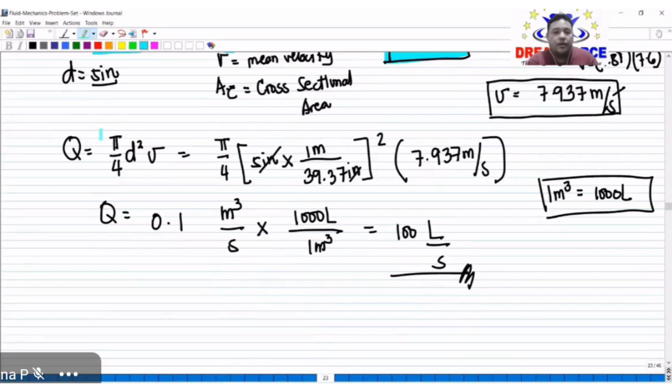Okay, next. Let's move on to number 40.

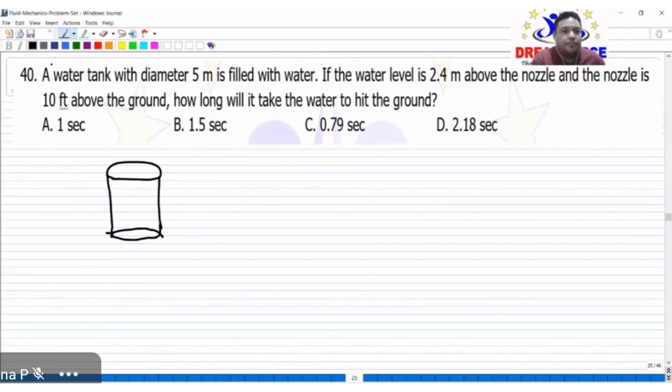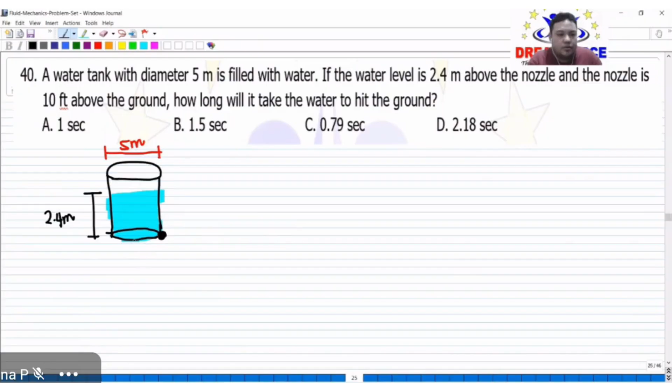Now, a water tank with diameter 5 meters is filled with water. Let's draw the tank. So given here is the diameter, which is 5 meters, and this is filled with water. If the water level is 2.4 meters above the nozzle, from the surface of the water to the nozzle, this is 2.4 meters, and the nozzle is 10 feet above the ground, meaning there's a stand. So this is our level ground, and the height here is 10 feet.

How long will it take the water to hit the ground? Take note, the tank has a hole, a nozzle, a small hole, and the path of our fluid will hit the ground. So it will form the track of a projectile.

So now the question is, how long or what time will it take the water to hit the ground? Since it's a projectile, let's use the equations of projectile motion. Take note, we are given the height. This is your releasing point, and the angle of release is 0, because it's naturally occurring, it just drops straight down. So theta here is 0.

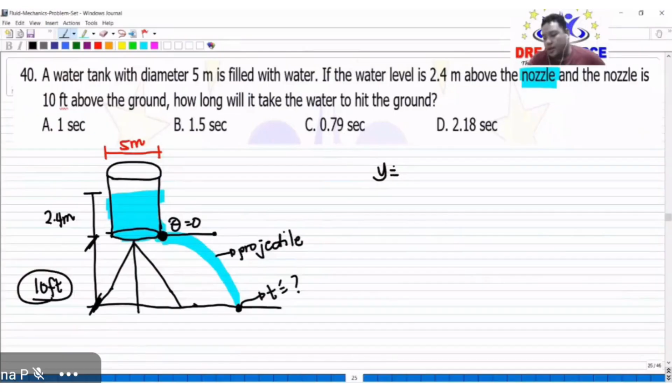Since we're solving for time, we use the y equation: y equals VOY times T minus 1/2 G T squared. Take note, VOY is VO sin theta. Our destination is lower than the releasing point, so our y here is negative 10. This equals VOY, which is VO sin 0 times time. But what is sin 0? It's 0.

Minus 1/2 G T squared. Take note, 10 feet is given in English units, so naturally we use gravity in English units too: 32.2 feet per second squared, multiplied by T squared. Let's just solve. So what is T equal to? 10 times 2 divided by 32.2, then we take the square root.

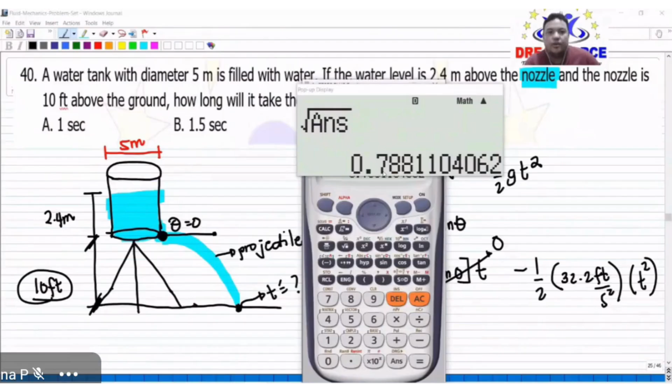Wait. 10 times 2 divided by 32.2, so that's correct. Okay, so that is 0.788 seconds, or approximately letter C.

Okay, now let's move on to number 14.

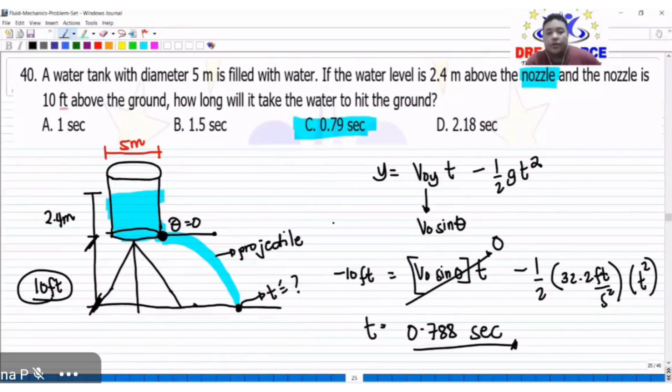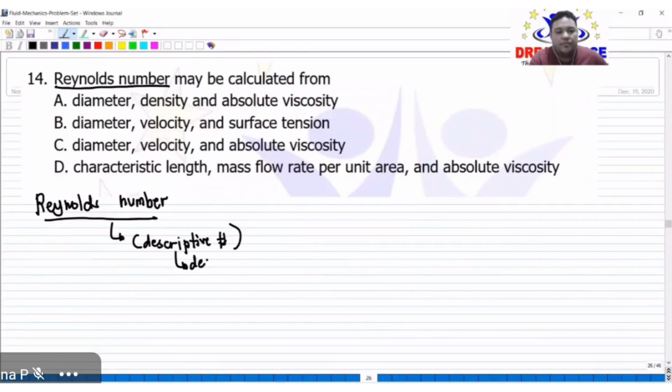Number 14. So Reynolds number may be calculated from what? Where do we find Reynolds number? Take note, the Reynolds number, when we say Reynolds number, it is a descriptive number — it describes what type of flow it is, the type of fluid flow. Actually, there are three types of fluid flow. But take note, our RE or Reynolds number is represented as RE.

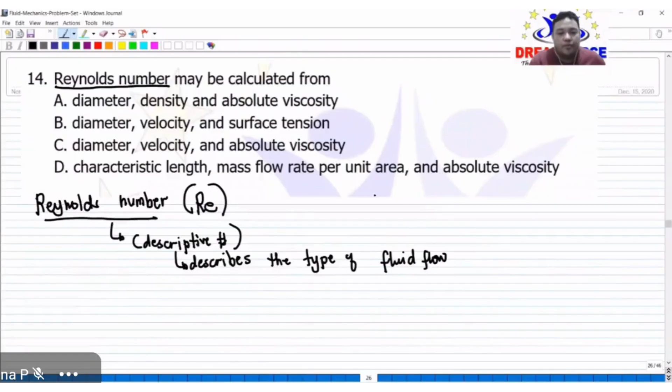First type of fluid flow is laminar. What is laminar? That is RE less than 2,300 — this is laminar flow. What is laminar flow? It's a fairly slow flow. A sample of laminar flow is oil, which is somewhat viscous.

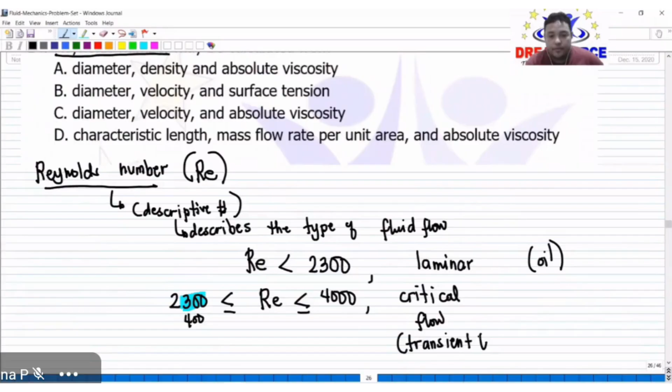Next is in between 2,300 to 4,000 — this is critical flow. In some books, this range is sometimes 2,000 to 4,000, depending on the book you're checking. The one I'm following is 2,300. So this is critical flow, or what we also call transient flow, in between 2,300 to 4,000, inclusive of both 2,300 and 4,000.

And lastly, greater than 4,000 — this flow is more chaotic, faster. This is what we call turbulent flow.

And our Reynolds number can be solved using the following formulas: RE equals V times D all over mu K, or equivalently V times D times rho all over mu D. Let us define the following: RE is your Reynolds number. Take note, since it's just a number, it is unitless.

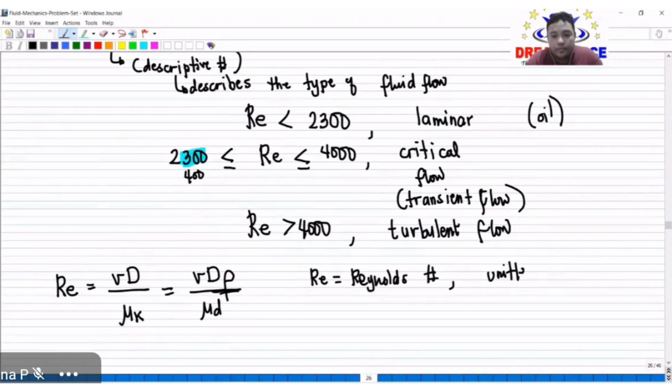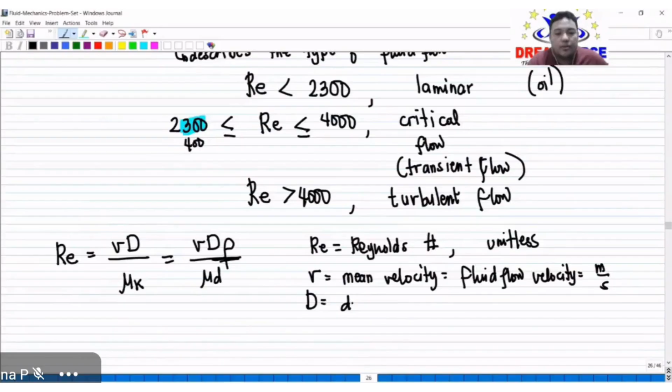So our V here is the mean velocity, or the fluid flow velocity. In terms of SI units, this is meters per second. How about D? This is the diameter of the pipe. We also have mu K, which is your kinematic viscosity, and the unit for that is meters squared per second.

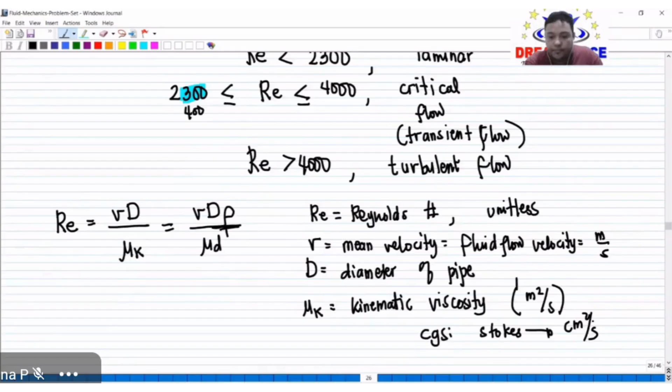And when in CGS units, this is in the form of Stokes. So the CGS unit or counterpart is Stokes, which is also equivalent to cm squared per second. So that is the equivalent or counterpart of kinematic viscosity in terms of CGS. Now, what is viscosity? When we say viscosity, this is the ability of the fluid to resist flow — meaning how thick or sticky your fluid is. That is our viscosity.

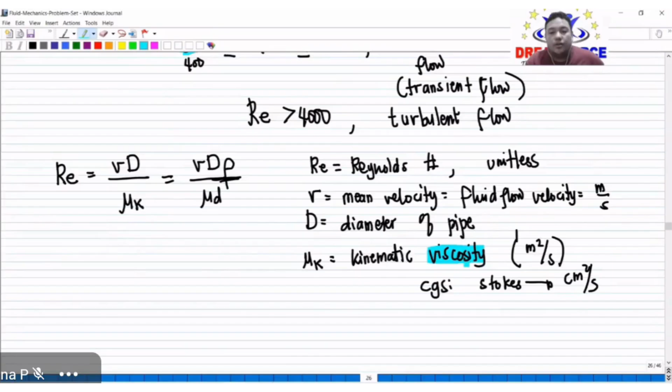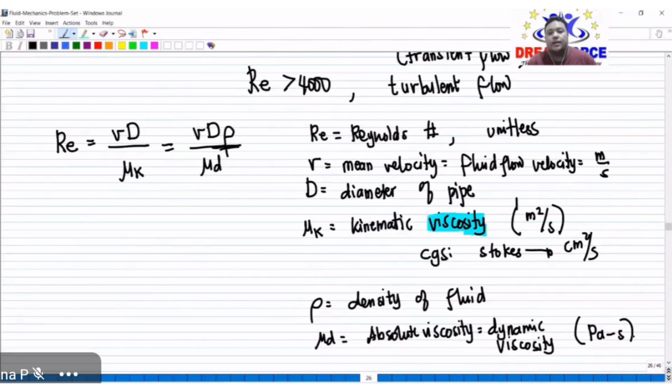And we have also your rho. This is your density ng fluid. And yung ating mu D, this is your absolute viscosity, or yung tinatawag nating dynamic viscosity. So, anong unit nito? This is in Pascal second. Pascal second.

Kapag po naka-CGS ito, this is in the form of poise. Ano po yung poise na yan? So poise is 1 gram per centimeter second. Okay, so that's poise.

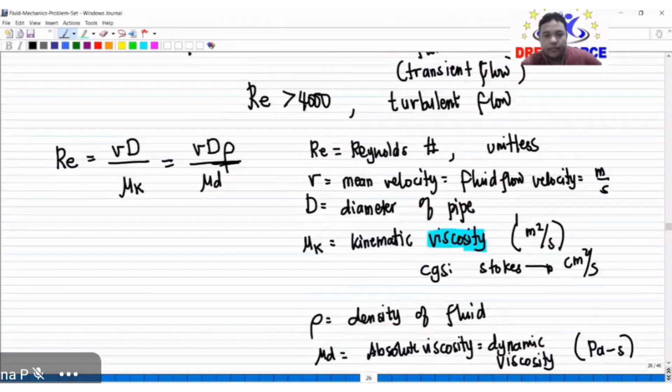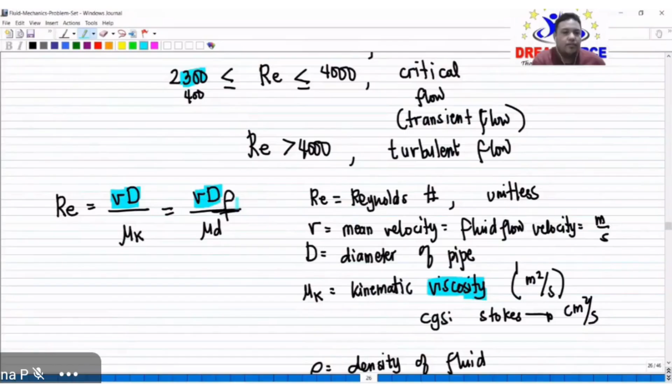At ano pa ang napapansin natin dito? Okay, sa ating RE, meron tayong V, meron tayong D. Ang kakaiba lang dito is yung isa may density, then iba yung ating mu. So, yan yung common sa kanilang dalawa.

So, why not dito sa number 14, kunin na lang natin yung common. Lahat po naman ito may diameter, yung A, B, C at D. Pero take note po, yung D natin wala, characteristic length, and wala naman to sa ating mga formula. So wrong na yan.

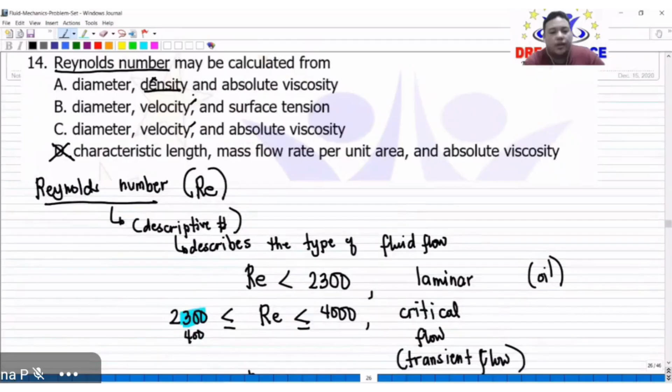So, dito, common ang velocity. So wrong na rin tong letter A kasi yung density natin is special formula to. Kapag mu D ang ating formula. Then, lastly, yung letter B, wala namang surface tension. So yung pinaka-common yung kukunin natin, letter C po yung sagot.

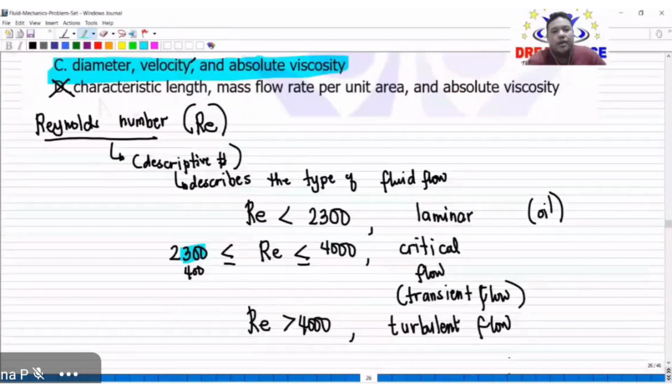Diameter, velocity, and absolute viscosity. Very common yan. So, diameter, merong diameter yung dalawang formula, merong velocity yung dalawang formula, and meron rin absolute viscosity. So, ito, that is letter C.

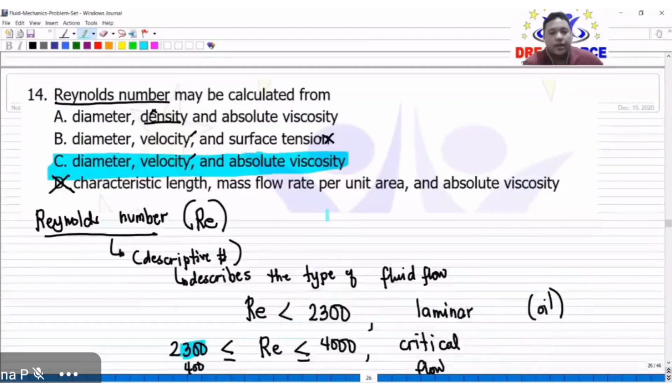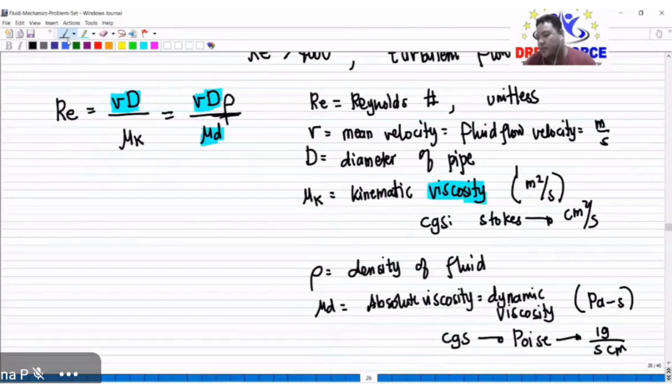So, yeah, part 1. Then, part 2. Then, part 3. Okay, take note po, kapag naka-SI naman na lahat, hindi ko na isusulat yung unit kasi magka-cancel rin siya. Pakitaan ko lang kayo ng isa, then let's solve other problems na wala ng unit kapag SI. So let's move on to number 22.

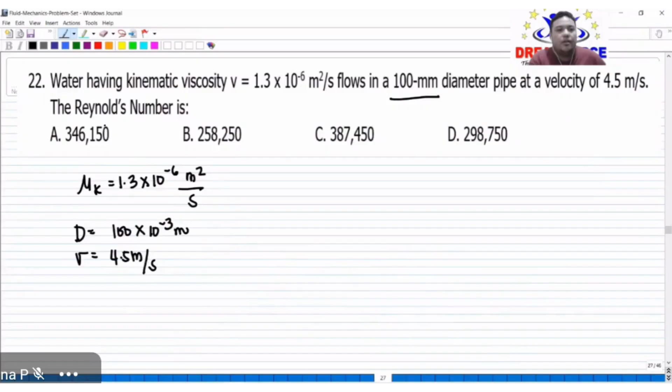Water having a kinematic viscosity, so yung ating mu K, that is equal to 1.3 times 10 to the negative 6 meters squared per second. Flows in, so yung ating diameter given, this is 100 times 10 to the negative 3 meter, at a velocity equal to 4.5 meters per second. Now, what's the Reynolds number? So R yung hinahanap natin.

Take note po, mu K yung given guys. So therefore, ano po ang ating Reynolds number? V times yung ating D all over mu K. So this is now equal to 4.5 meters per second multiplied by yung ating D, which is 100 times 10 raised to negative 3 meters, all over mu K, which is 1.3 times 10 raised to negative 6 meters squared per second.

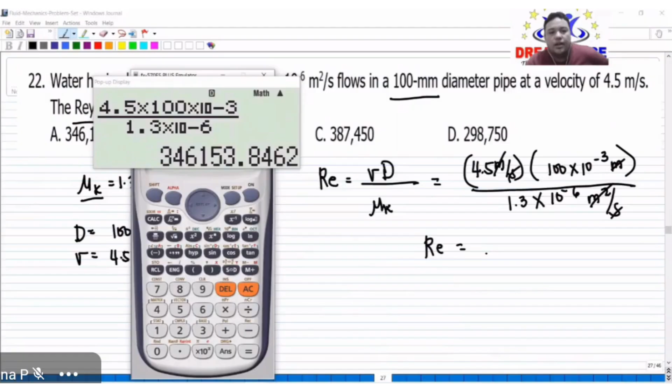So ano mga magka-cancel? Meter squared. So second at second, so unitless. And what's your R now equal to? So this is 4.5 times 100 times 10 to the negative 3 all over 1.3 times 10 to the negative 6. That is 346,153.

Okay, so type of fluid flow, this is turbulent, letter A. So, direct substitution lang yung mga ganito na. Basta alam lang natin yung formula.

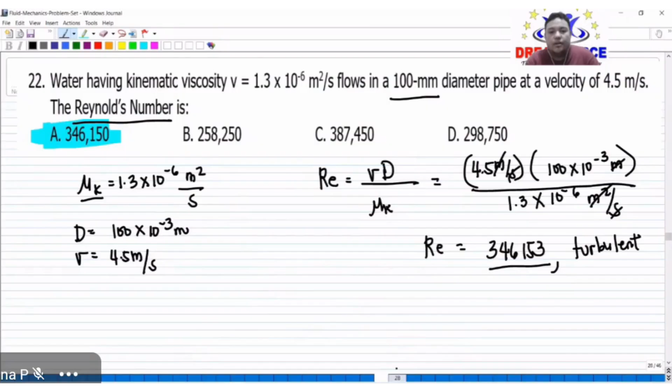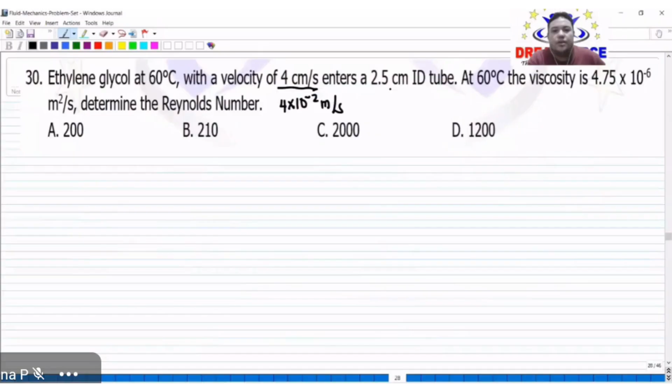Number 30. Ethylene glycol at 60 degrees Celsius with the velocity, this is 4 times 10 to the negative 2 meters per second. Enters a 2.5 cm ID tube, okay so meaning ito yung diameter natin. So D is equal to 2.5 times 10 to the negative 2 meters. At 60 degrees Celsius, the viscosity is 4.75 times 10 to the negative 6 meters squared per second.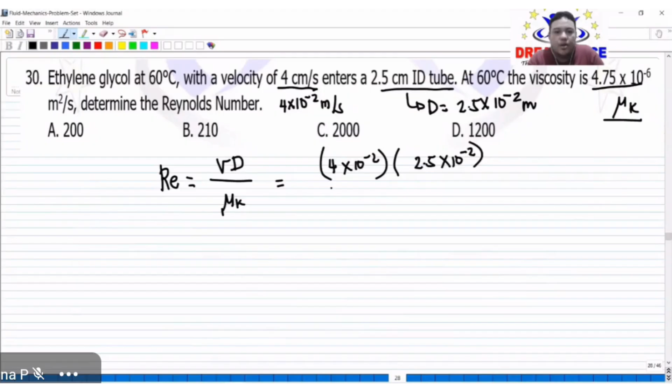So, this is your kinematic viscosity. Determine now your Reynolds number. Kinematic viscosity yung given. So therefore, this is equal to what? So VD all over yung ating mu K. So this is now equal to 4 times 10 to the negative 2 multiplied by diameter, 2.5 times 10 raised to negative 2, all over viscosity, which is 4.75 times 10 to the negative 6. Direct substitution.

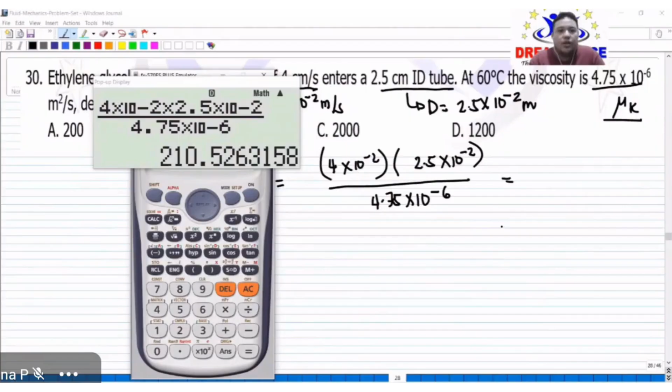So this is equal to 210.52 or 53 na. And this is type of flow, laminar. So this is letter B.

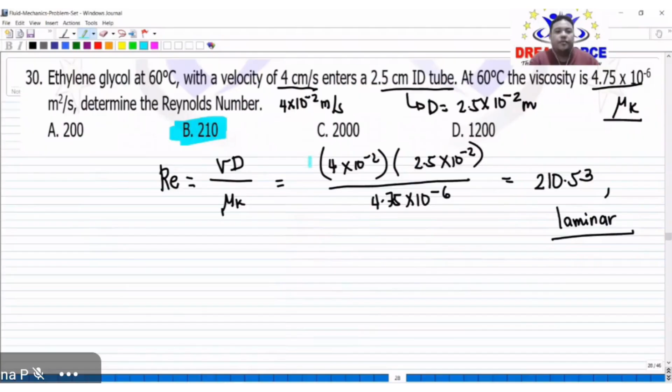So next na tayo. Number 31. Take note po, imbis na circular yung binigay sa atin is square, of side B, 2.5 times 10 to the negative 2 meter. 2.5 by 2.5. So ito medyo nakakalito kasi square section yung cross section natin.

If your air is at temperature 350 Kelvin, determine the Reynolds number. So at 350 Kelvin, yung ating viscosity is 20.76 times 10 to the negative 6 meters squared per second. So this is your kinematic viscosity. So for a square section po, paano kaya yung treatment natin dito?

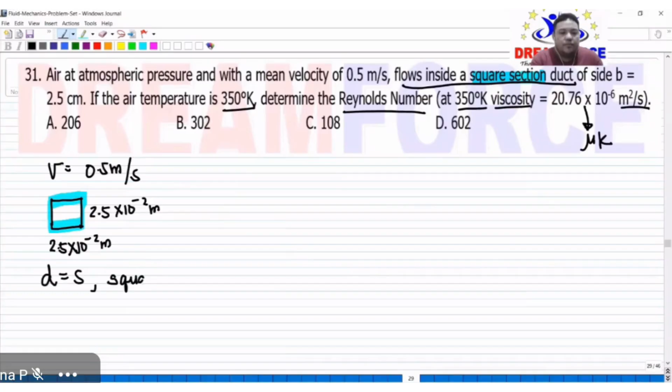Take note po, your diameter will be equal to the side. So this is for square ducts, yung diameter mo equal rin yan sa side. So therefore, RE is equal to what? So V times D all over mu K. So this is equal to 0.5 multiplied by diameter, which is equal also to the side, 2.5 times 10 to the negative 2, all over 20.76 times 10 to the negative 6. What is your Reynolds number equal to?

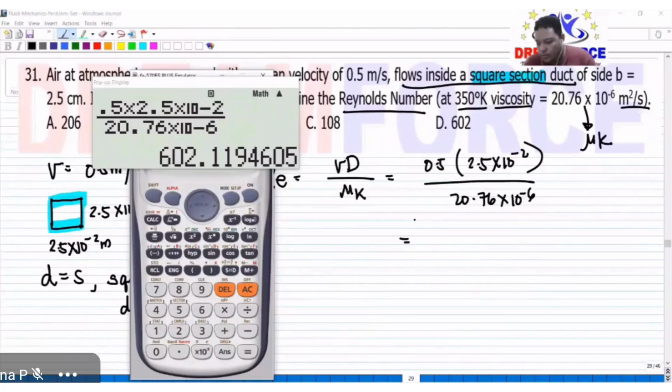So this is 0.5 times 2.5 times 10 to the negative 2, all over 20.76 times 10 to the negative 6. So this is 602. And type of flow, laminar. So this is letter D.

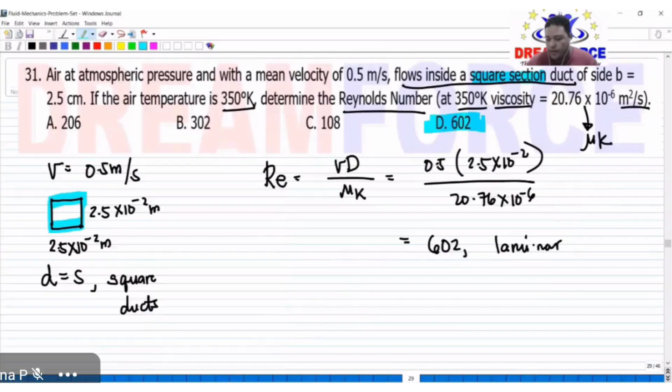Okay, next, number 32. Water is flowing to a pipe of radius 12 inches. So our radius, 12 inches, let's convert to diameter, this is equal to 24 inches. Take note, when Reynolds number is what we're looking for, it should be in SI. So let's multiply this by 1 meter is 39.37 inches. So our velocity, 11 meters per second.

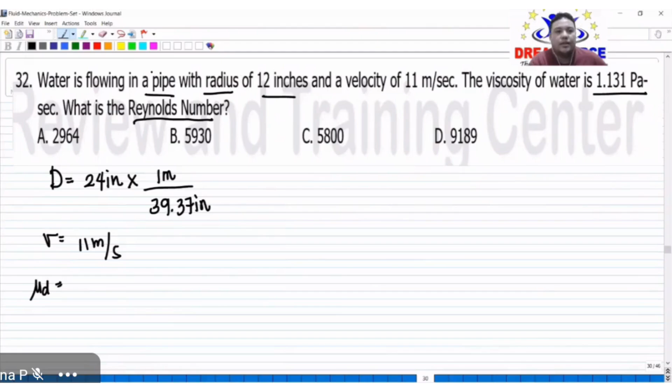Now, the viscosity of water is mu d. Why mu d? Pascal-second is our unit. So our mu d, 1.131 Pascal-second, unit for SI.

What is the Reynolds number? Take note, in terms of mu d, R is equal to V multiplied by D times our density, all over mu d. So this is now equal to velocity of our fluid flow, 11, SI. D is 24 multiplied by 1 over 39.37, already in meters. Multiplied by density of water, in SI this is 1,000 kilogram per cubic meter. So water ito. So times 1,000 all over 1.131 Pascal-second, already in SI.

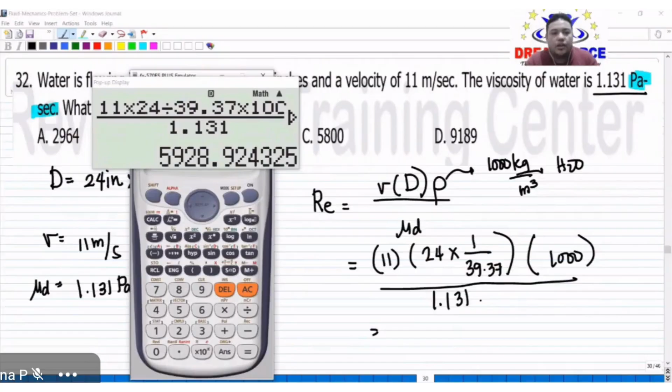So 11 times 24 divided by 39.37 times 1,000 over 1.131. So this is equal to 5928. Okay, and this is approximately letter B.

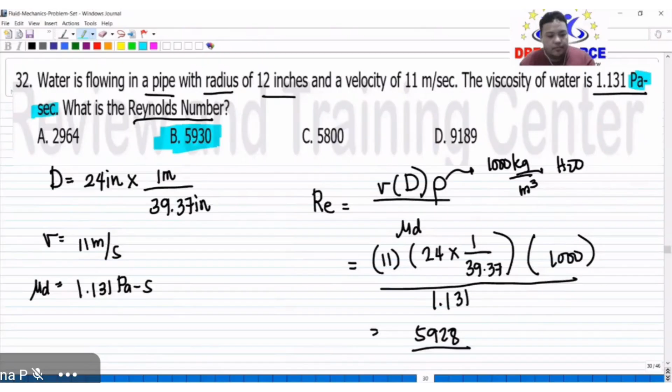So let's move on to the next, number 18. What is the rate of flow of water passing through a pipe with diameter 20 mm and a speed of 0.5 meters per second. So rate of flow, if we don't know this, let's check our units. As you can see, rate of flow is in cubic meter per second, all of it. So when it's in cubic meter per second for all, this is volume over time, or this is your discharge. So rate of fluid flow, Q is what we're looking for.

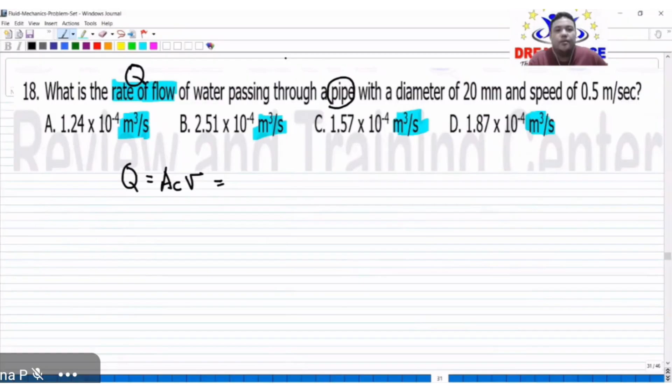So what do we know about Q? This is equal to cross-sectional area times our velocity, or the mean velocity. So therefore, this is equal to what? Take note, pipe is our cross-section, circle. So that is pi over 4 multiplied by our diameter, 20 times 10 to the negative 3 meter, the quantity squared, multiplied by the velocity or the speed, 0.5.

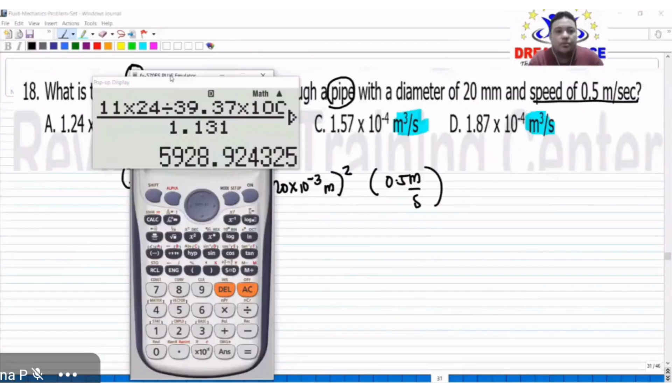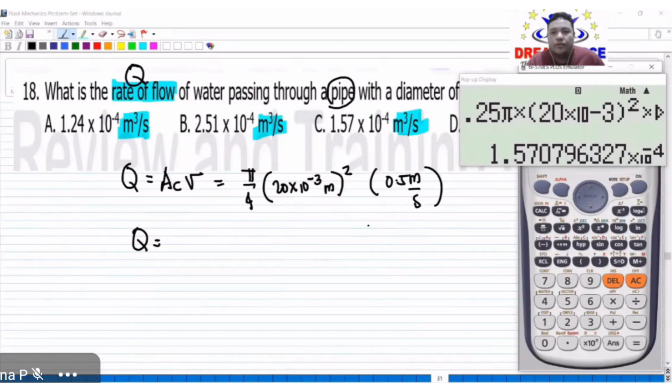So what is Q now equal to? Direct substitution. So 0.25 times pi times 20 times 10 to the negative 3, the quantity squared, times 0.5. And this is now equal to 1.57 times 10 to the negative 4 cubic meter per second. That's letter C.

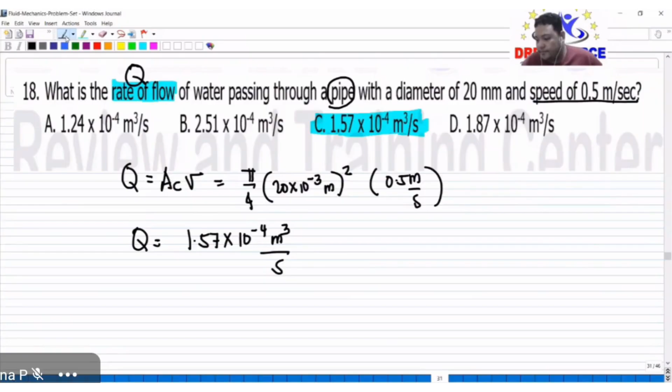So determine the mean velocity of your engine oil, flowing at, take note, our unit here, kilogram per second. And from your thermodynamics, what do you call this kilogram per second? So this is your mass flow rate. So what is mass flow rate? This is denoted as mdot, and that is equal to mass per unit time. So our mass flow rate, that is equal to 0.01 kilogram per second.

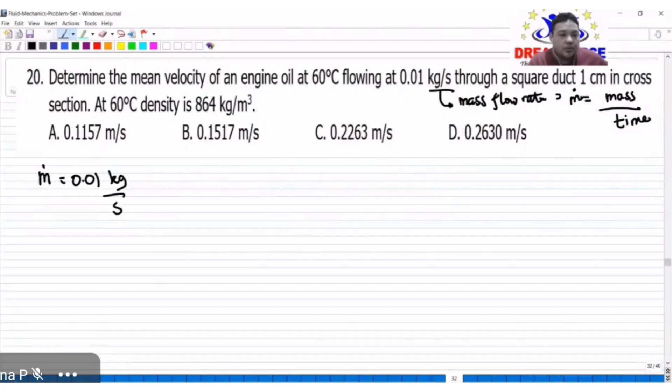And our cross-sectional area is a square. So this is equal to 1 cm in cross-section. So this is 0.01, the quantity squared. So at 60 degrees Celsius, our density of oil is equal to 864 kilogram per cubic meter. So that's that. But what we want is velocity.

Take note, we have mass flow and we have density. So where can we get velocity given the mass flow rate and the density? Take note, density is mass over volume, mass flow rate is mass per unit time. So that means we have volume as a parameter here. So that is your discharge already. That is equal to cross-sectional area times our velocity. So therefore, velocity now is equal to your Q over your cross-sectional area.

Take note, our Q is volumetric flow rate or discharge. So let's convert our units here into discharge by means of unit analysis. So therefore this is equal to what? We need the kilogram to cancel here. So what do we do with this 0.01 kilogram per second? We need the kilogram to cancel.

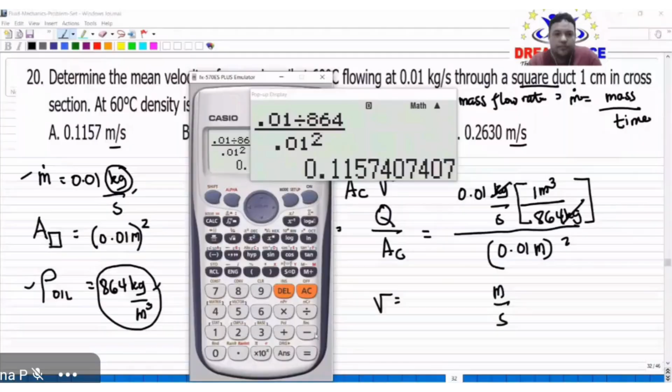So velocity now is equal to what? What cancels here? Meter squared and meter, meter cubed, meter over second. 0.01 divided by 864 over 0.01, the quantity squared. So this is now equal to 0.1157 meters per second, and that's letter A.